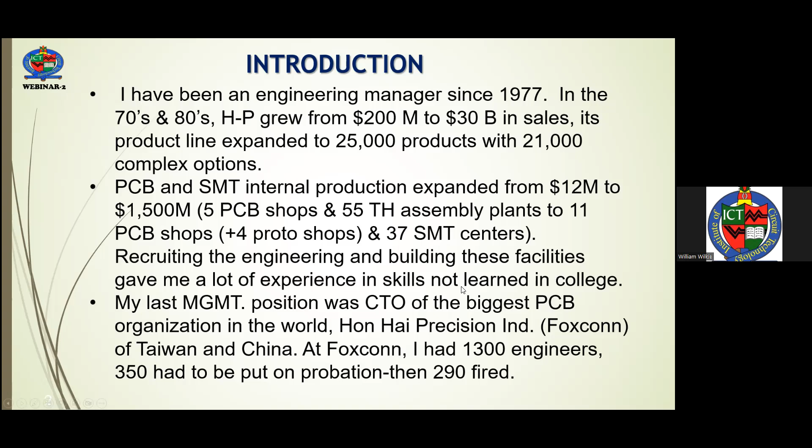But Foxconn being quite a bit different, Foxconn is a captive manufacturer. It's not really in the merchant market, and consequently always slid under the radar. And so, going from prototype and quick turn to extremely high volume was an interesting learning experience.

So we're going to talk about three of the most important parts of essential skills. These are all an important part of setting up the smart factory and also setting up the business objectives and goals for automation. You've had your homework reading assignments for the chapters of this that are in the book. If you haven't downloaded it, be sure to download it and read it, because I'm summarizing the chapters in 15 to 20 minutes. So there's much more illustrations and information in the particular chapters for you to go after.

And so my number one is total quality control, also called total quality management. This is one of the foundations of any kind of manufacturing, and one that I spent a lot of time in Hewlett-Packard learning. We were training everybody, design engineers, manufacturing engineers, production workers, in total quality management, which was started when Dr. Deming personally kicked off the program at Hewlett-Packard. He did that provided every executive and the president of the company sat in the front row of his course, because Deming very much believed that these programs are top-down driven.

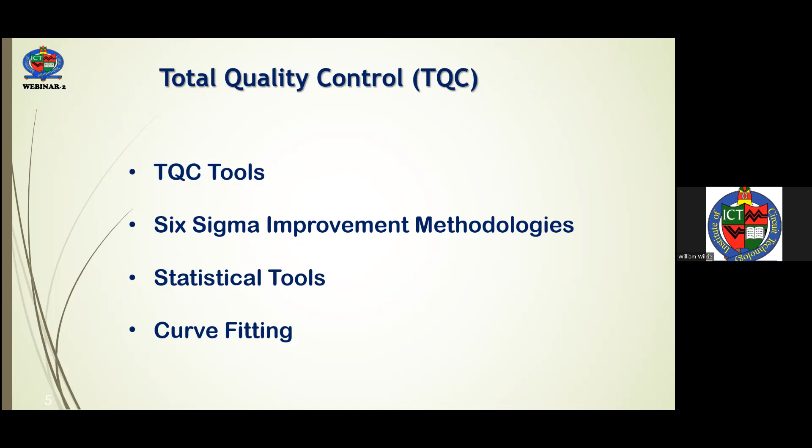And like I said, all of our executives were in the front row of the auditorium. As a junior engineer, I was kind of in the back, but nonetheless got a chance to listen to Dr. Deming personally. And so today, we'll talk about total quality control and another way of looking at that, Six Sigma methodologies, and then some of the statistical tools and curve fittings and design of experiments.

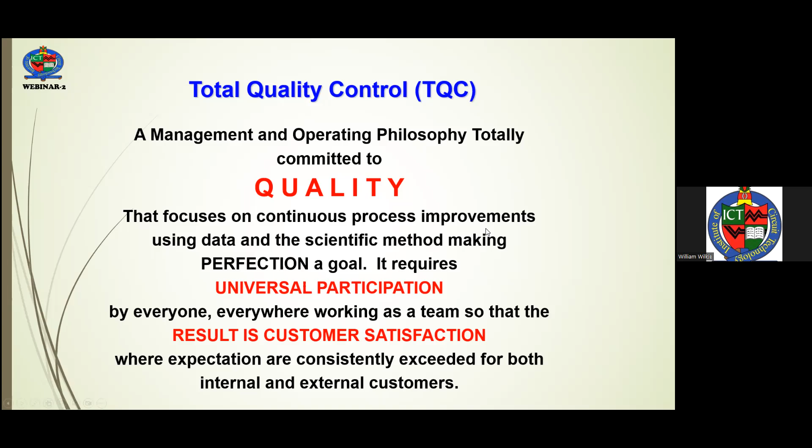So total quality control is a management operating philosophy committed to quality that focuses on continuous process improvement using data and the scientific method, making perfection a goal. It requires universal participation by everyone, everywhere, working as a team so that the result is customer satisfaction, where expectations are consistently exceeded for both internal and external customers. The simple little flow chart: focusing on customer satisfaction and quality leads to improved market share, decreasing prices and costs, improvement in profits and profitability. And I found this essentially to be true.

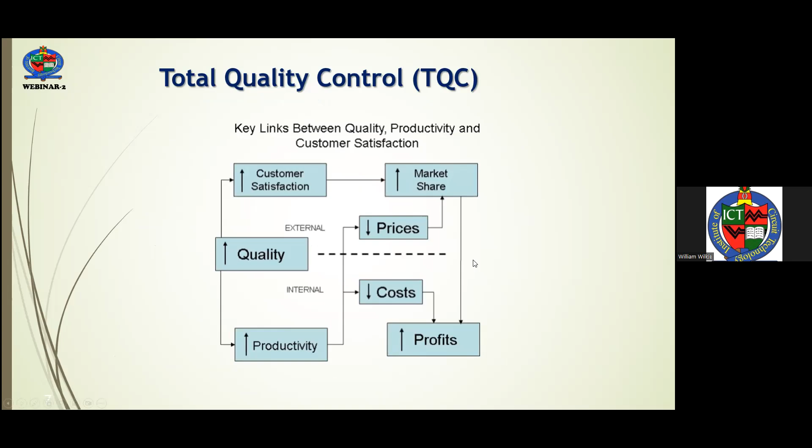So total quality control is not a new program. It's basically a management philosophy and an operating methodology requiring breakthrough thinking rather than doing things the same old way that we've always done them. It's a structured, disciplined approach to identifying and solving problems, developing new technology, and institutionalizing the improvements gained from those disciplines. It's not just firefighting, or hopefully will replace firefighting. It's conveyed by actions of management, not just by slogans and posters.

In other words, it's basically top driven. So it's a top down focus rather than bottoms up. It's a long-term focus rather than short-term. And it's supported by some of the QC tools that we'll talk about today. And this is one reason why TQC hasn't necessarily caught on, because it's not something where you send an engineer or supervisors to a course trying to get this thing from the bottom up. This really is a top down methodology. Like I said, Deming would not show up to start the program if the president of the company and all the vice presidents and executives were not in the front row through the entire program.

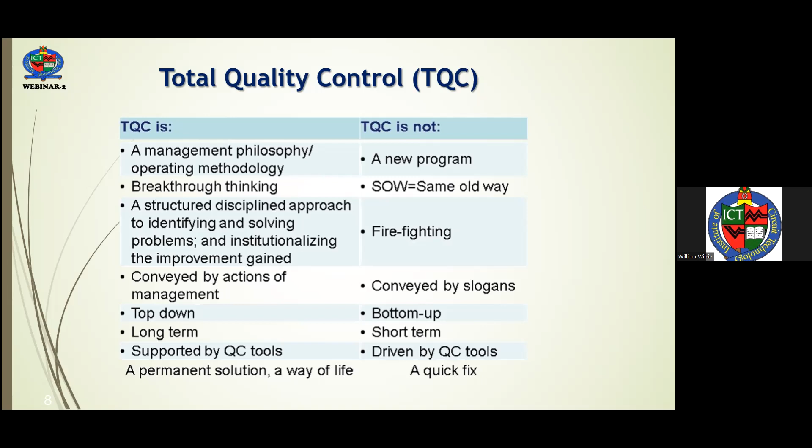And it essentially took hold because you realized that expectations were set by your boss. They weren't bottom-up, where you're trying to convince your boss how important this total quality control was. No, just the opposite. Your boss was teaching you how important it was. And so expectations totally got changed. And until you have that kind of management commitment and management philosophy, a lot of times these quality programs just won't stick and won't be effective.

So management commitment is really important here, as well as a customer focus on what you're doing, the continuous improvement, and employee empowerment, and everything being fact-based decision-making, focused on process improvement. So the tools for data analysis and display, I'll go over next, are cause and effect, histograms, Pareto, pie charts, scatter diagrams, spider diagrams, flow charting, cost benefit analysis.

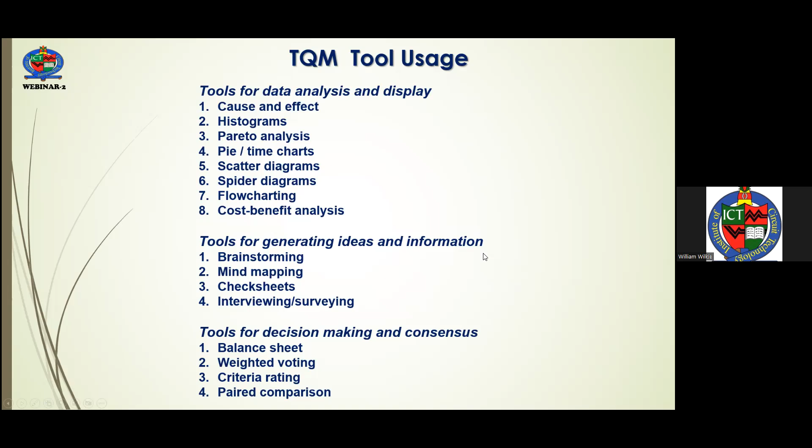But there are also tools for generating ideas and information: brainstorming, mind mapping, check sheets, interviews, and tools for decision-making: consensus gaining, weighted voting, criteria rating, paired comparison. So these are the fundamental TQC tools that you learn in total quality control in terms of process flow charting, fishbone diagrams, also called Ishikawa diagrams, histograms, Pareto charts, correlation, and control charts.

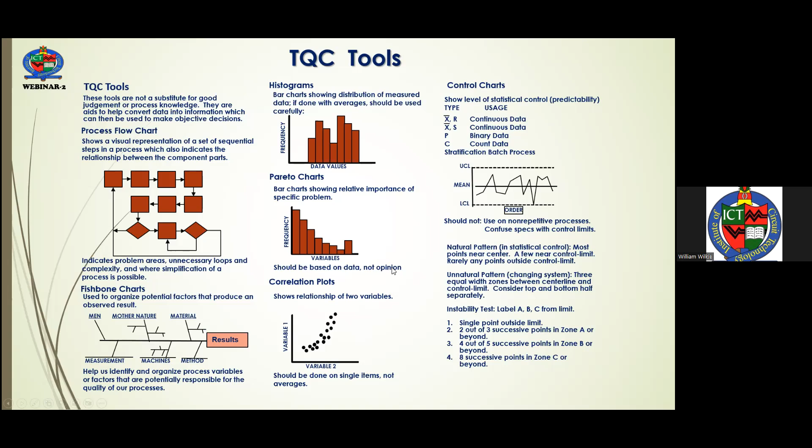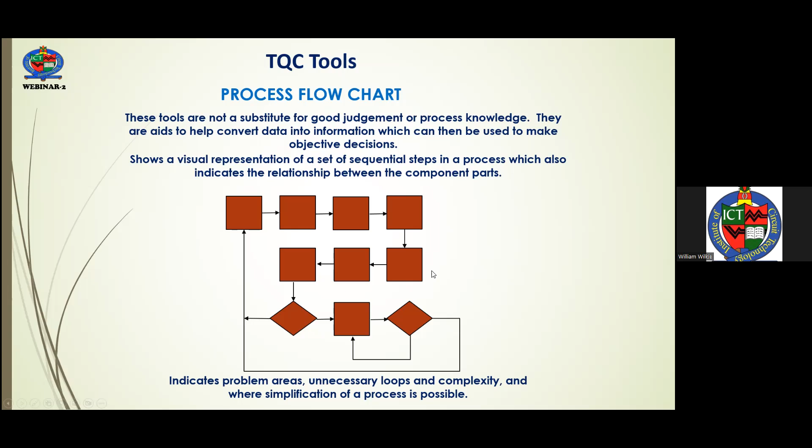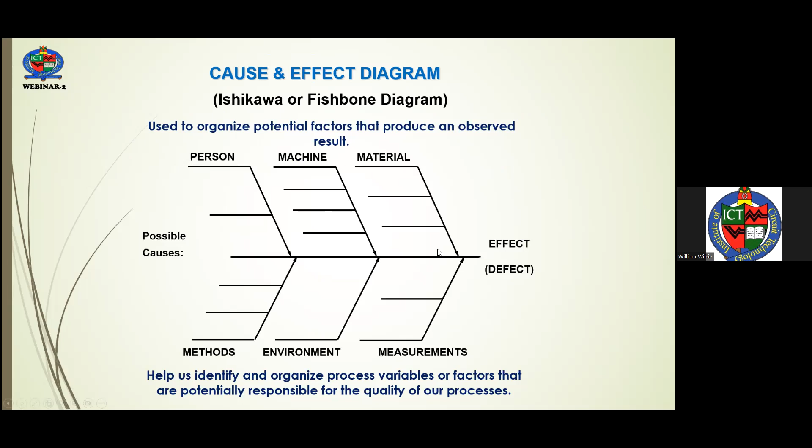So these tools are not a substitute for good judgment or process knowledge. They help convert data into information, which can then be used to make objective decisions, indicating problem areas or unnecessary loops or complexities, and where simplification of process is possible. Cause and effect, the Ishikawa or fishbone diagram, is useful to organize potential factors that produce an observation, be it customer satisfaction, yield improvement, defect elimination, or productivity.

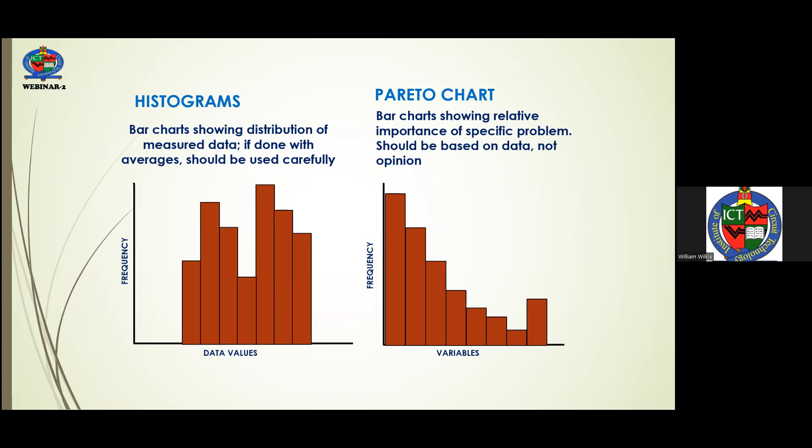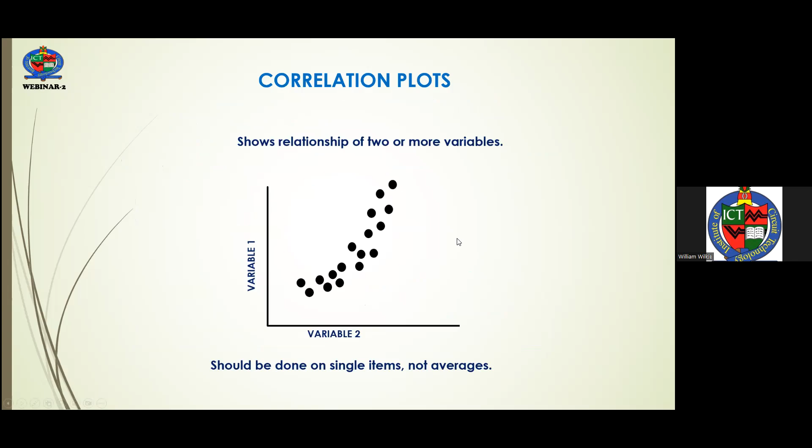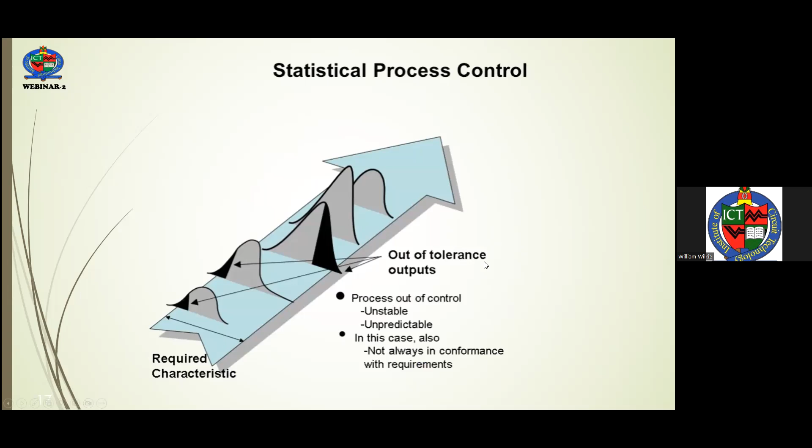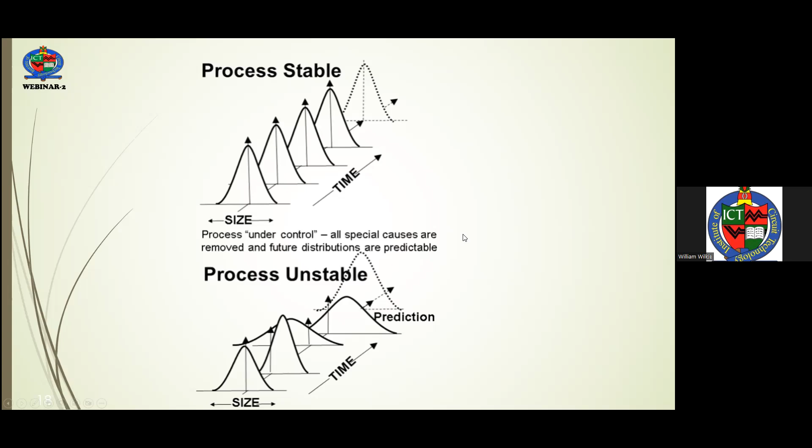Statistical process control, which this begins to focus on, helps show the out of tolerance situations, or the process being unpredictable or unstable, so that a stable process, over time, works within the predicted distribution. An unstable process may, over time, move in and out of what's defined as a stable process.

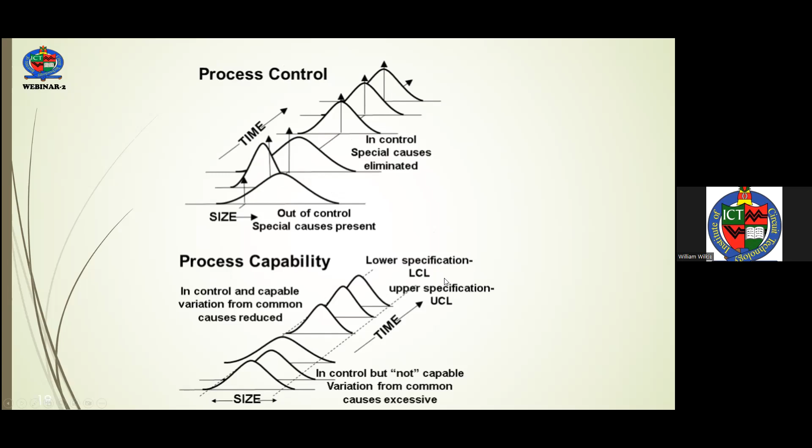And so, in control, special causes are eliminated from looking at an out of control process, or the process capability, in terms of upper or lower, so that a process may be in control, but it's not capable, because the variation from common causes is excessive.

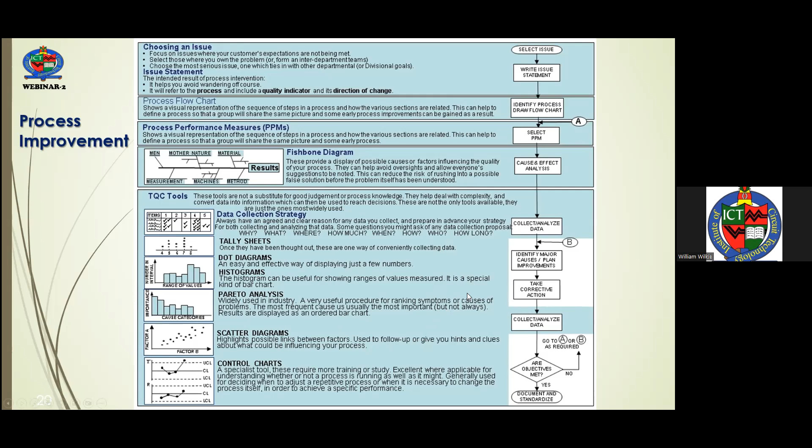If you look at using this for process improvement, then you go through a specific stepwise function of focusing and choosing, selecting the issue, creating an issue statement, producing a process flow chart, selecting process performance measures, using cause and effect analysis in a fishbone diagram based on that, and then using the different TQC tools to collect data for the strategy, analyze it, look for interactions, and put together the required action.

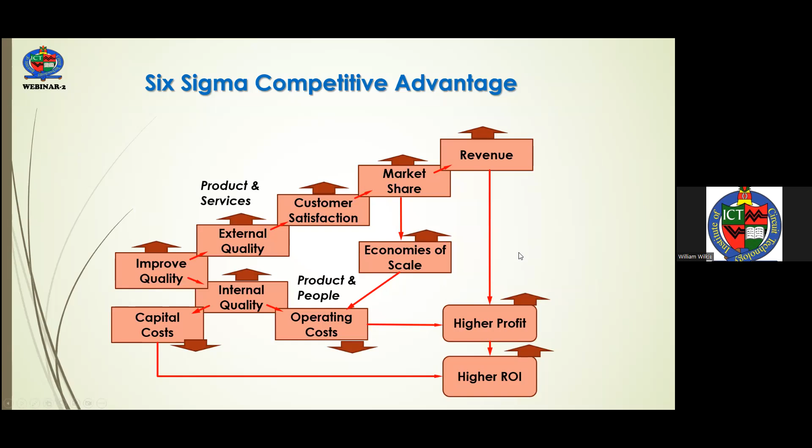This is similar to Six Sigma's competitive advantage, in which improving quality in producing products and services leads to higher profits, improved revenues and improved market share. A little bit different than TQC, but it's basically still the same focus.

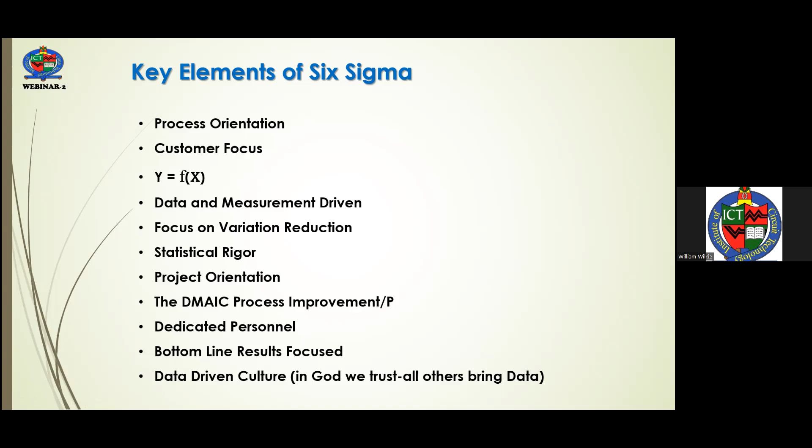The key elements of Six Sigma are a process orientation, but also a customer focus, and that data is collected and used to produce measurements and focus. And the focus is on variation reduction, or having a Six Sigma response, using statistical rigor and process improvement methodology with the bottom line.

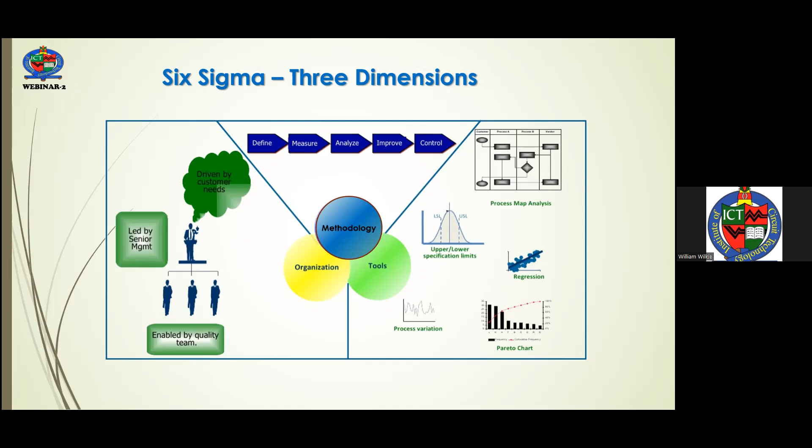So, Six Sigma has three dimensions: led by senior management, enabled by quality teams, and driven by customer needs, the methodologies, and then the tools in order to achieve business objectives set up by the organization. And total quality management and Six Sigma methodologies are numerous.

In the skills ebook, I've highlighted some of the chapters, but you can see that Six Sigma and TQM is much larger than just what I outlined in my essential skills. And that's one reason why it's useful to spend the appropriate time over the years, maybe each particular year, learning an additional skill within this methodology.

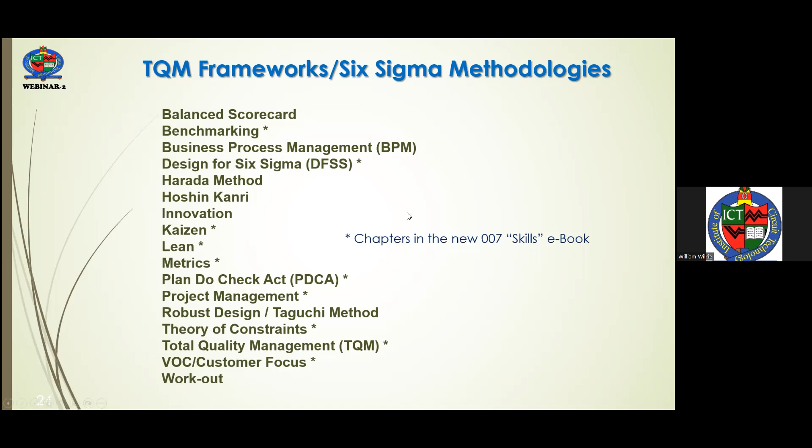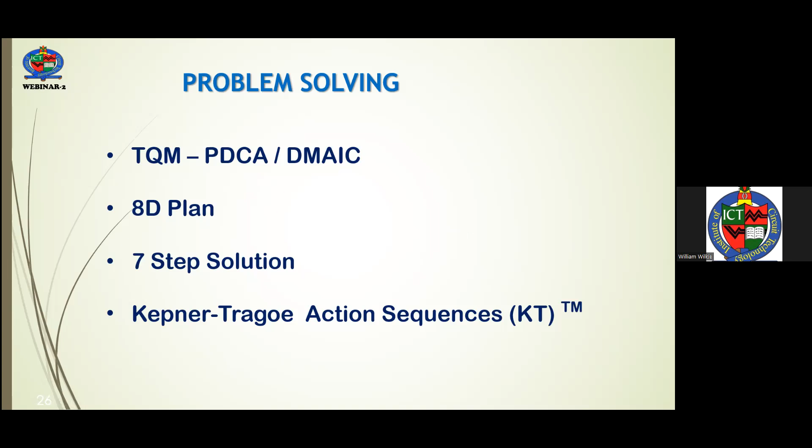One of the biggest methodologies and the most important is problem solving. And so both TQM and Six Sigma have the plan, do, check, action, and DMAIC methodology. There's also the 8D planning, the 7-step solution, and lastly, the Kepner-Tregoe action sequence, KT.

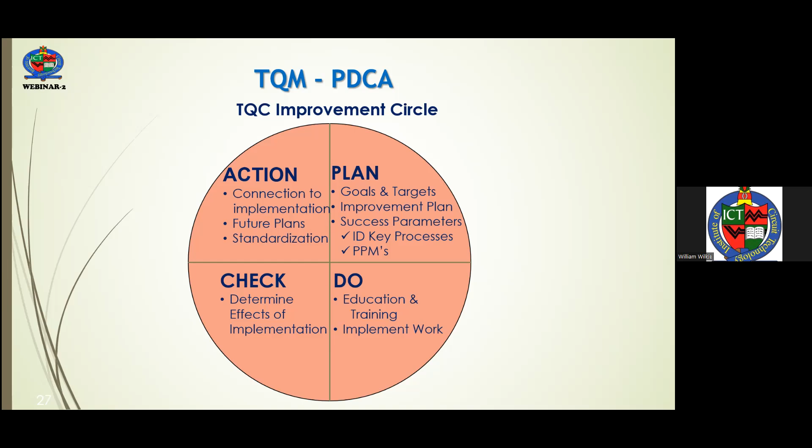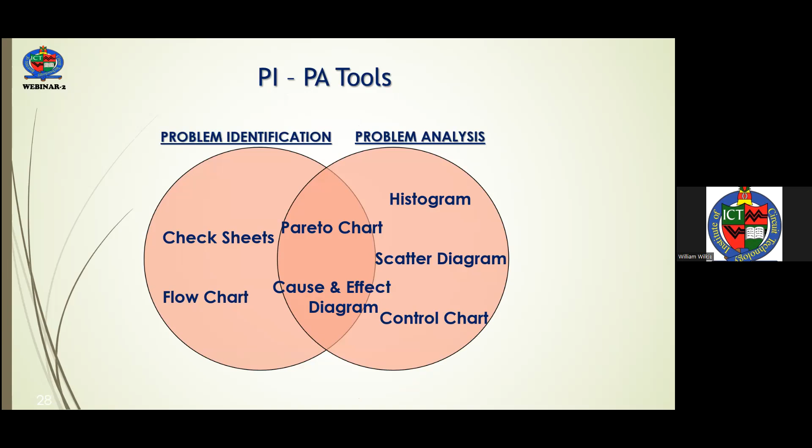This is one that TQM uses, that's basic, the plan, do, check, action circle, useful in terms of setting up goals and targets, setting up the improvement plans, the success parameters, education and training, checking for that, and then actions to standardize this. Within this, there are problem identification and problem analysis tools. And these are some of the ones we've talked about before in terms of flow charts, cause and effect diagrams, or scatter diagrams in terms of identifying a problem or analyzing a problem.

The DMAIC from Six Sigma talks about defining, identify and state the practical problem or objective, validating the practical problem by collecting data, measurement, analyzing the data, confirm and test a statistical solution, improvement, and convert the statistical solution to a practical solution, control. DMAIC.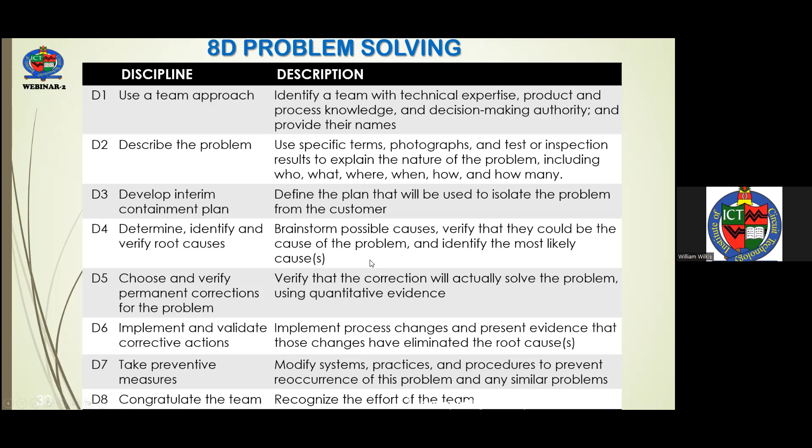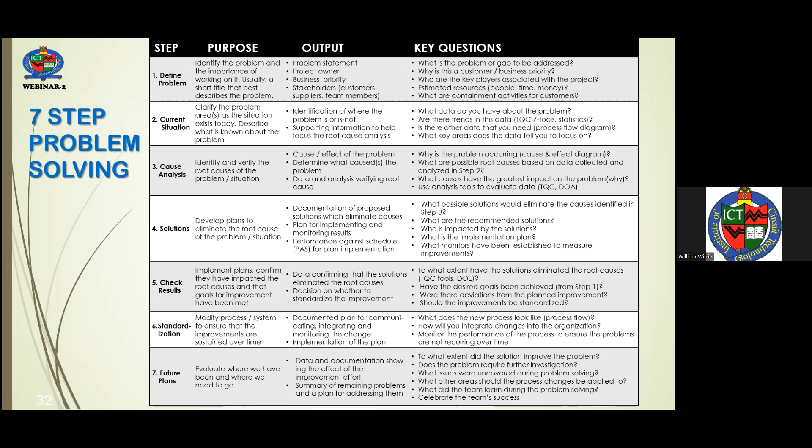This also matches the 7-step problem-solving methodology that sometimes they use in terms of: define the problem, clarify the problem with the current situation, identifying and verifying the root causes of the problem, cause analysis, developing a plan to eliminate the root cause of the problem, checking the results, modifying the process or systems to standardization, and then evaluating where we have been and where we want to go next.

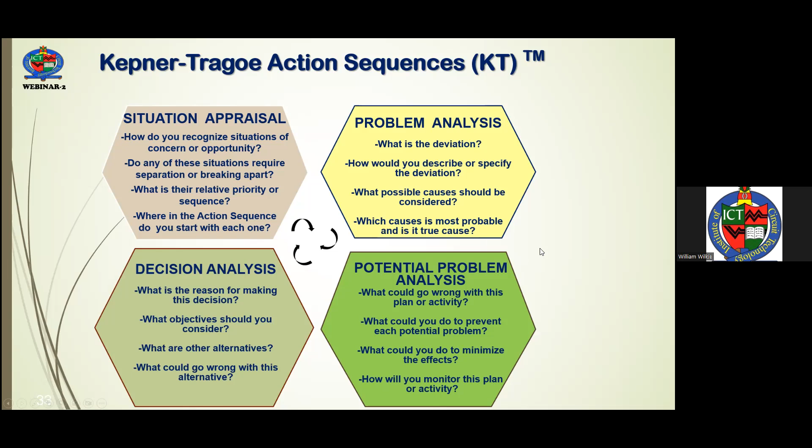My particular favorite is a result of a 3-day course I took from a company called Kepner-Tregoe, so it has a trademark, that focuses basically on situation appraisal, problem analysis, potential problem analysis, and decision analysis. The Kepner-Tregoe action sequence is very useful. This actually is a copy of a little plastic card that I have with me. I took this course in the mid-70s and still have that card and use it today

in terms of reminding of the steps in a problem analysis: the deviation statement, specifying what it is or is not, developing possible causes, testing of the probable causes, and explain it is or it is not, and verifying the data, and then moving on to decision analysis to choose a course of action, establishing the objectives, classifying the objectives in terms of wants and limits, generating alternatives, and comparing and choosing what fits and doesn't fit.

And then also at the same time, doing the potential problem analysis to assure success of the activity in terms of the action plan statement, anticipating problems, anticipating likely causes and their probability, selecting the action, and then providing information.

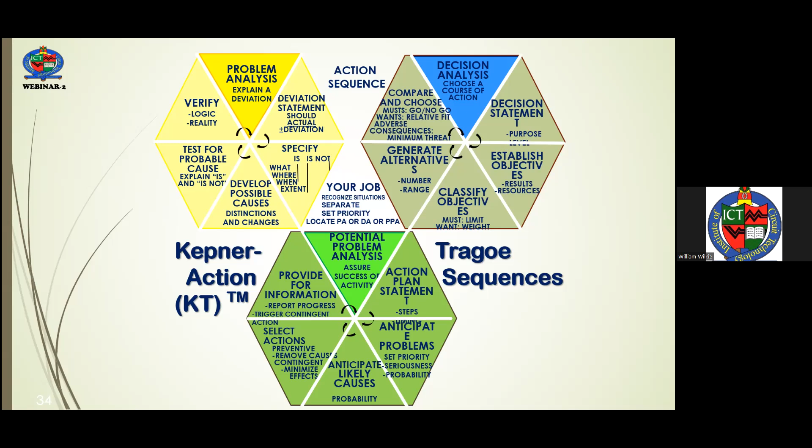And so one of the things, especially in printed circuit manufacturing and assembly, is this curve that I developed, in that this is a thermodynamically related process curve. In other words, the performance measure goes from 100% or perfect down to 0. And if the solid line there is our current process, if we can move from the solid line by a process improvement to the dashed blue line to the right, then whatever our problem is, or whatever the process is, we move from 2' to 2, but with the new process, we move up in performance to 3.

At the same time, if we can have feedback to printed circuit design in terms of best practices, how to improve the printed circuit board for manufacturability, or many times what we call design for manufacturing and assembly, then instead of 2 to 2', our product can be simplified. In other words, we move to the left, and so you would go from 2 down to the 2' by simplifying the product.

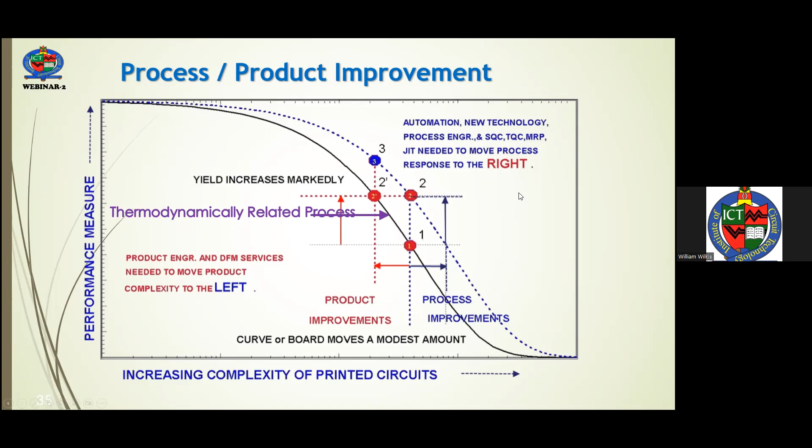So there are two elements: the product improvement and the process improvement. The process improvement is what manufacturing provides, but analyzing the cause of defects and yield loss and simplification can lead to product improvement. And that's a very useful tool as a feedback to improve not just your performance, but that of your customers and the like. So that depends on statistical tools.

And design of experiments is a very important methodology, and it's a series of well-established statistical approaches to addressing challenges over a wide range of disciplines. Design of experiments was basically created out of World War II and the use of agricultural statisticians working for the government. But design of experiments is a typical method that can be used not just to solve root cause identification of issues, but also for process optimization and assessment of inherent robustness of response, which in the new smart factory is now being called a digital twin.

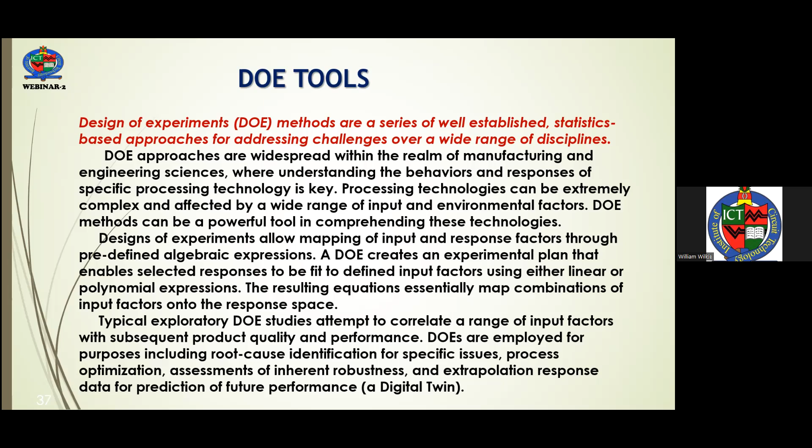So in the 1990s, the National Bureau of Standards, the US government, was distributing a popular statistical document called Handbook 91. That was replaced, and in response to Sematech, the semiconductor consortium, they created a new web-based statistical handbook, including statistical software, called the E-Handbook of Statistical Methods. We call it the Engineering Statistics Handbook. This is one of the best handbooks and software designed for process engineers such as those of us in printed circuit fabrication or electronic assembly.

And this is not like a university text where they focus on the mathematics of statistics. This is one of the best books written for a working process engineer. And so you'll see that, look at some of the chapters, but also to make this usable for everybody, it's available in 7 different operating systems, as shown there in the bottom.

Because I don't know how long this is going to be available on the internet for free, I encourage everybody to download the Engineering Statistics Handbook and the software. And I caution you about printing it out. The Engineering Statistics Handbook is 2,800 pages. It's designed to be a hypertext reference document. It's not really a printed book, unless you're used to carrying around 2,800 pages. It's much more useful because of its hypertext ability on a tablet or a simple slate PC for review.

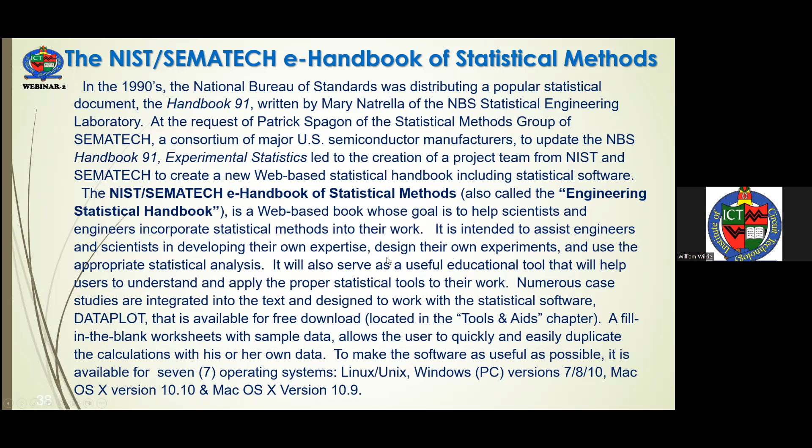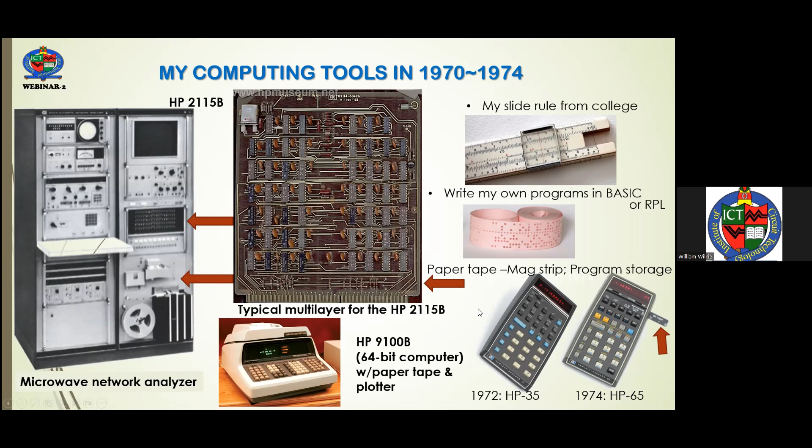But I also had sometimes the 64-bit computer with paper tape reader, the HP 9100B down there, which, interestingly enough, is the world's first portable computer. Even though it's a 64-bit computer, we had to call it an instrument controller because in 1968, when this device first came out, 64-bit computers required an air conditioning plant and were the size of a small house. And no one would believe that you could make a 64-bit computer the size of a typewriter, as it's seen in the middle. So we called it an instrument controller, but it's a full 64-bit computer that I used.

Typical of design of experiments was this program I wrote in 1970 in BASIC using the Plackett-Burman design for experiments. This particular one was focused on electroless copper voids. And this shows a little bit of the 96-line BASIC program and the program output from having to write the software. Today, you have the ability of the Sematech handbook and all of this software being available for you free of charge to download. But when I started, that wasn't the state. And we had to do this on our own if we wanted some of the work.

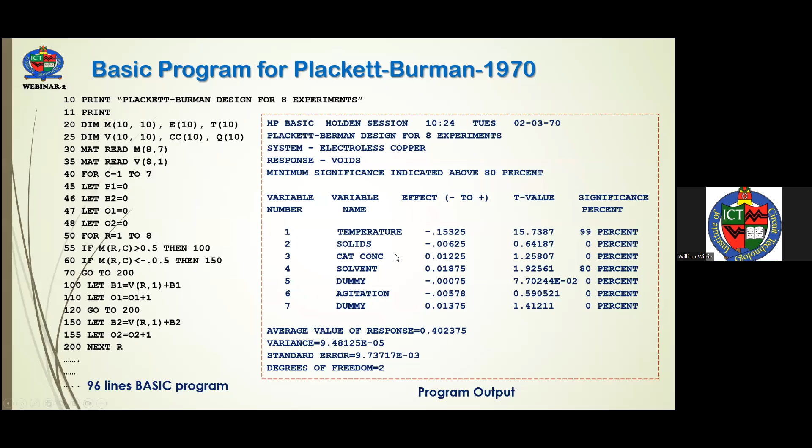So the NIST Sematech e-Handbook of Statistical Methods is an excellent, not just handbook, but it provides examples and tutorials so that if you're not familiar with any of the statistical techniques, that's okay, because they start out with the very basic assumptions and provide areas like selecting the right statistical tool, in terms of measurement system analysis, or you want statistical process control, or method comparisons, or design of experiments, which I'm talking about. And are the factors in the design of experiments quantitative only, or not all of them quantitative?

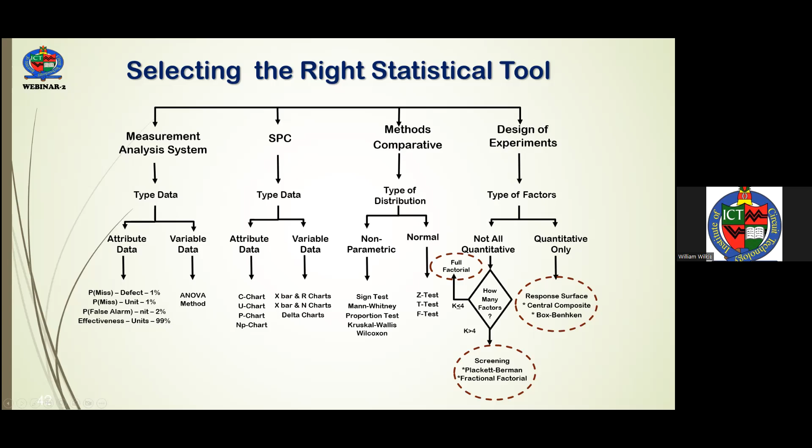Here's what you'll see if you go to this particular URL I provided there. Unfortunately, you cannot go to nist.gov and find this any longer. About 10 years ago, other topics took over the website in terms of the main menu, but it's still within the website. Again, I emphasize, please download it and download the software as soon as possible, because there's no guarantee how long that'll continue to be available for free.

But one thing you can see there in the handbook chapters is, the first chapter is not about mathematics. It's about, do you have a problem? Exploratory data analysis. And the 8 chapters move you through how you would solve the problem in terms of measurement of process characteristics, measurement of production process characteristics, process modeling, process improvements, and then process monitoring or control, and product and process comparisons, and finally, assessing product reliability. In other words, if you think you've solved the problem, great, but have you, in creating this solution, created a reliability issue? So this is quite a bit different than a university course, in terms of how it focuses on the working engineers such as we have.

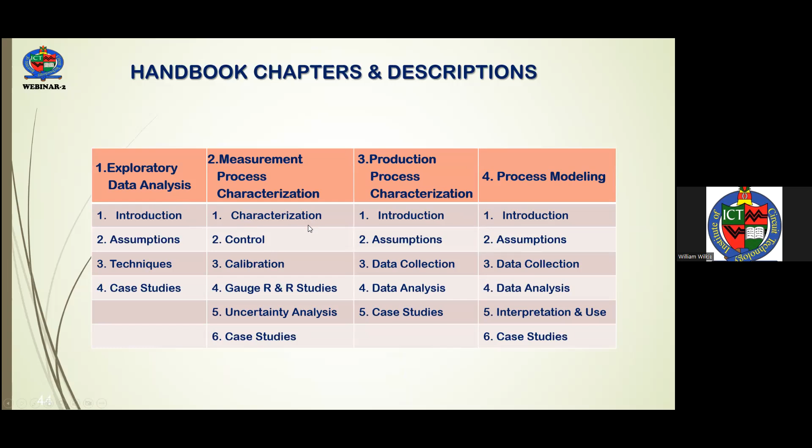Like I said, each of these chapters provides a case study, an example, a set of data, so that it takes you through using the software that you can download on your computer, and then gives you the feedback, and then encourages you to add your own data and your own variables into that, and then discusses the results. So this is very much an interactive and self-paced method of learning statistical tools in an excellent fashion.

And I first came across this about 25 years ago, looking for a way to assess Weibull reliability data. One of the things is because I didn't have a way to plot the unusual looking Weibull reliability data, and went looking for it and came upon this chapter 8, trying to figure out what have I found myself here, and eventually backed out to find an entire set of software and a book and a handbook available to provide a lot of insight that I hadn't had at university training.

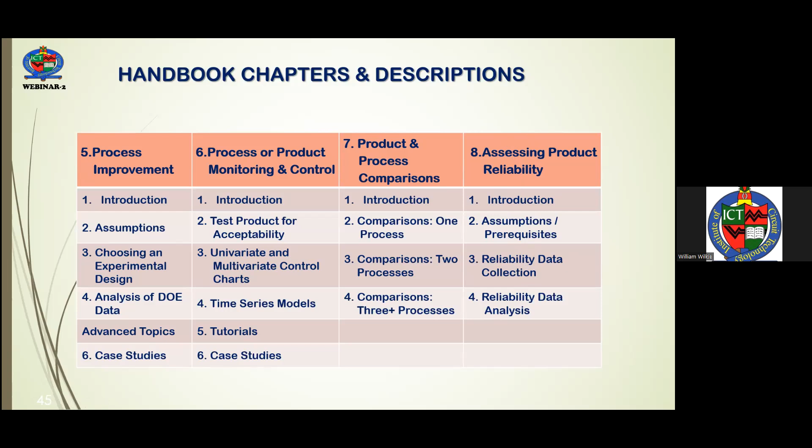Now, an important part of that, I also found in doing this, is curve fitting and correlation, which again is an important tool to help you establish the model. And this set of shareware software that's right here called Curve Expert is interesting because it provides 30 different regression models there in the upper right-hand corner already set up. So once you put in the data and save it, it'll show you the interactions and the regression analysis of different models. The model that I'm showing right here is one of my favorite.

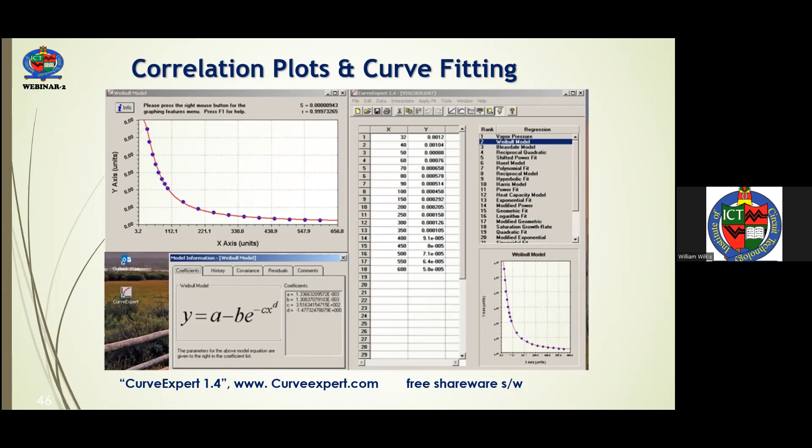This is the defect density model in semiconductor. The interesting thing about the defect density is it's the same model that governs printed circuit defects. So it's very, very useful in correlating independent and dependent variables of a particular printed circuit, and that's the Weibull model. But you can also enter your own models into this. Extremely useful, and because it's pre-set up, many times I go to this before I go to the data plot one that's provided.

So design of experiments is, fortunately or unfortunately, one of the ones that you might get at the university, but in my particular university, I was able to have a chemical engineering course on this, but the next year they dropped it because of the need to add other courses for the engineering. And so this is what I consider one of the most expensive, important of all tools.

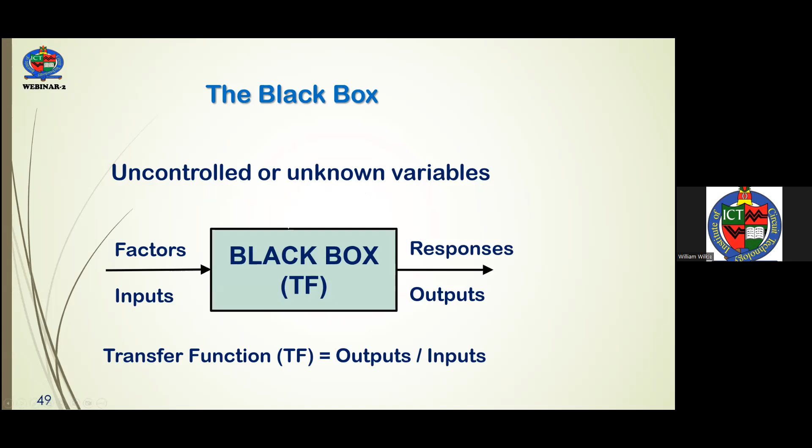And the reason is that many times what we're doing in printed circuit or assembly really involves a black box. In other words, we're providing the inputs and we're looking at the outputs, but the transfer function and what happens inside that black box is not necessarily something that we understand. And there are controlled and uncontrolled variables involved.

Now, the interesting thing about engineering is, when faced with a problem, I found that engineers many times have the wrong first action. The common sense approach is always recommended as let's hold everything constant and change one thing at a time. Well, this technique is fast and cheap when it works, as it often does for confirming single or independent factors whose presence can be logically suspected.

The biggest problem that I found in electronics manufacturing is that the independent factors we're looking at are the quantitative factors, grams per liter, temperature in Celsius, et cetera. Those variables that we've been told are important and that we should control. And so we have a tendency to jump on them first.

What's more likely to happen in the real world is that the qualitative variables are involved in this. And the qualitative variables may be winter versus summer. It may be first shift versus the second shift. It may be machine 1 versus machine 3, or tank 1 versus tank 3, or who did the maintenance or failed to do the maintenance. It's not a quantitative number like degrees Celsius or RPM.

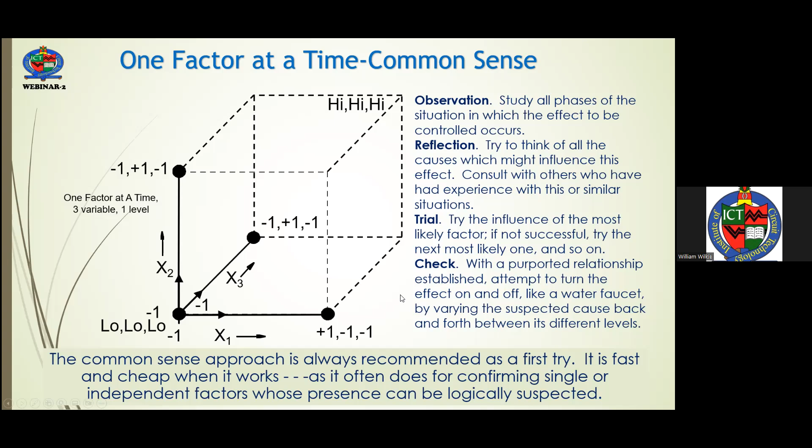It's qualitative. And because there can be many, many qualitative variables involved there, holding everything constant and changing only one factor at a time will not find the solution because you're not looking at the entire problem. And that's where you get into factorial design of experiments. The number of factors: if there's one factor, it can be solved by common sense and things like that. But what if there's 2 to 4 or 5 or more factors involved, both quantitative and qualitative?

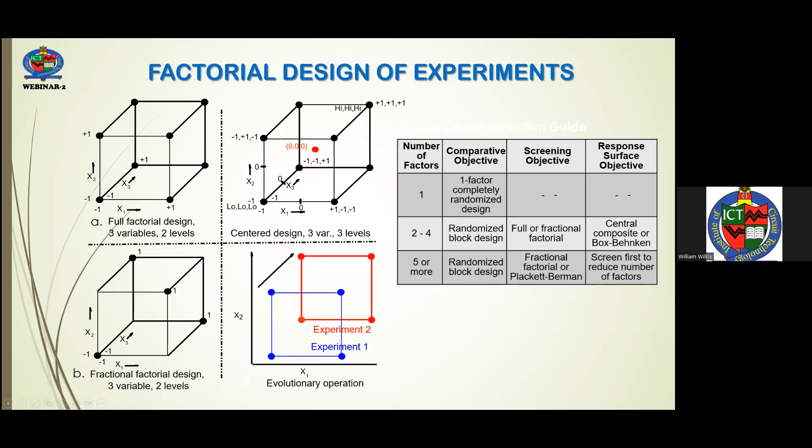And you get into what we call full factorial designs, or centered designs, or fractional factorial designs, and even evolutionary operations. That's one reason why in some of the problems that I was initially faced with, I had 5 or more variables. And so I needed a Plackett-Burman methodology. And to get that, I had to actually write the program in BASIC so I could run it on the HP computer, because I didn't have anything else available, and I wasn't at the university anymore.

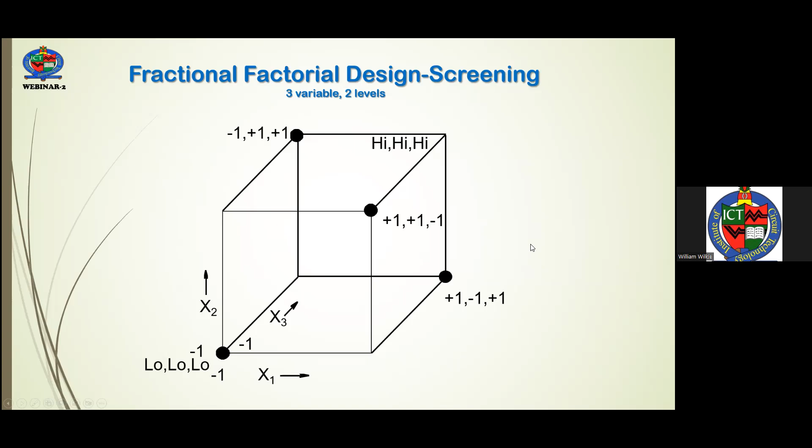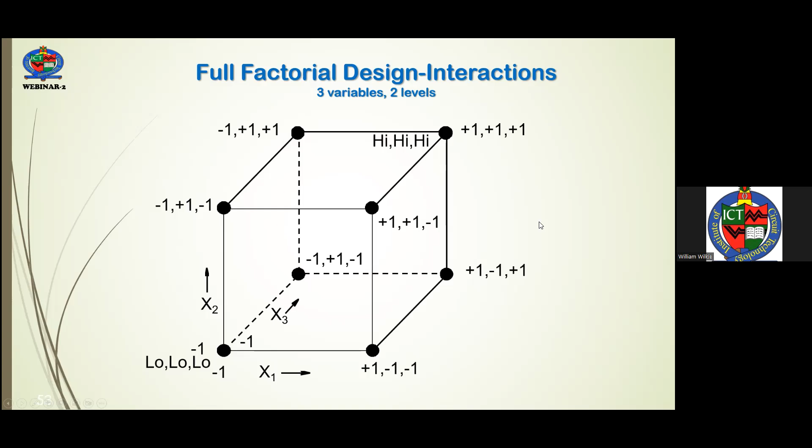After we've whittled this down to 3 or fewer variables, we may go to a full factorial design with interactions, because now we can check for interactions and detailed analysis, or even one with a centered design to have 3 levels, so we can check for linearity and nonlinearity as well as the interactions.

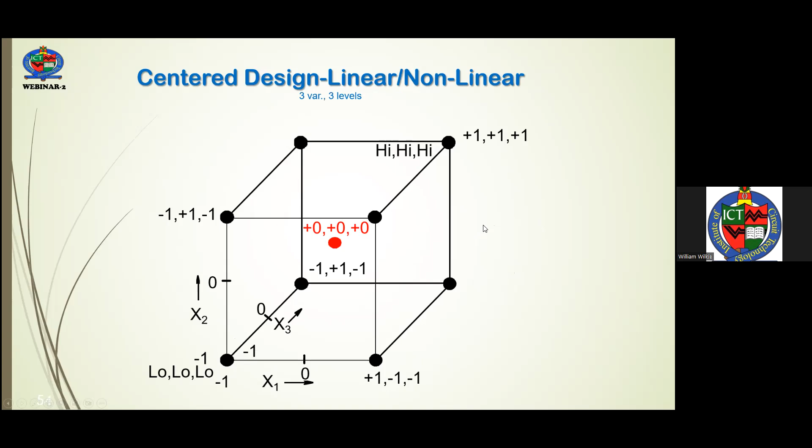And as the pulse went down the chain, depending on the opposite side of the prepreg, there is either copper or no copper at all, and you get a 1 and 0 with an op amp at the end of it. So when you turn this machine on, in 3 minutes this thing entirely loaded the 64-bit operating system and everything else. And then the variables, once it was run, were core memory based, but the read-only memory was this.

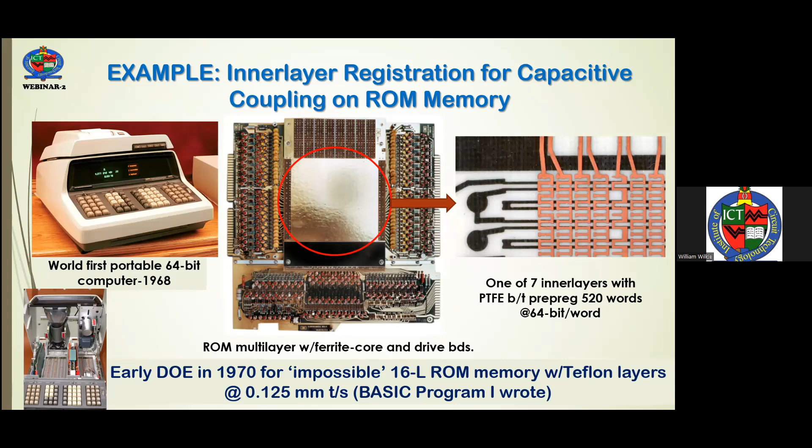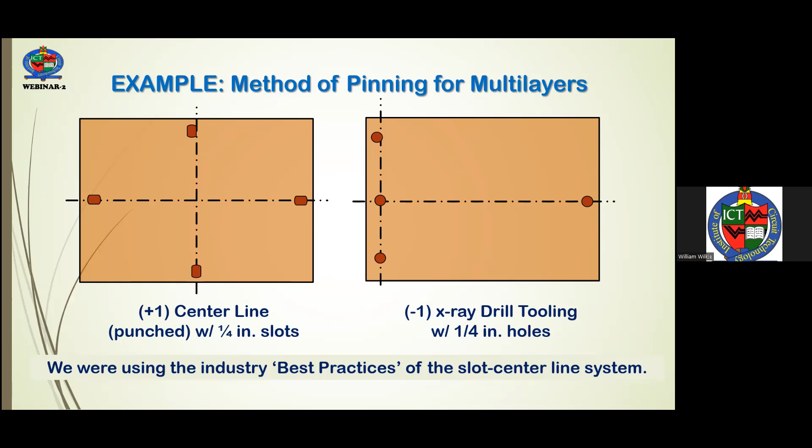Another example early on was looking at the difference between the industry best practice of a slot centerline system versus drilled X-ray tooling hole methodologies. And so another variable on this, not just the methodology, but the method of venting, either no venting or copper venting. And so this is kind of a full factorial design of 3 variables at 2 levels, whereas the response is the image shift in microns of the particular targets, whether or not we had venting, the tooling holes, and then the actual pressure.

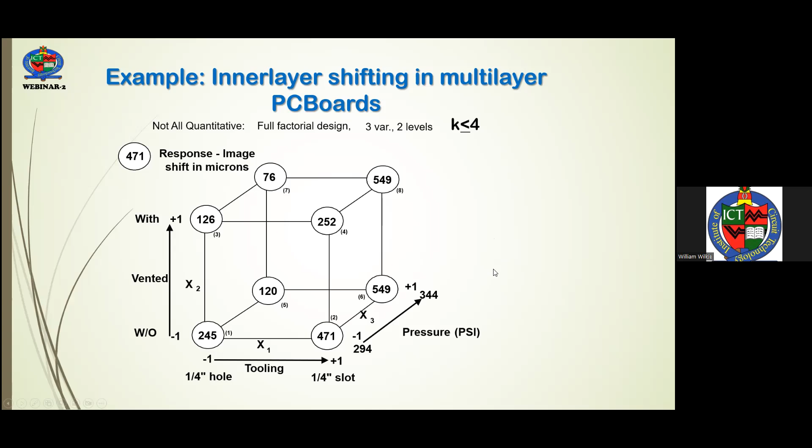So you can see that, yes, there's a quantitative variable in terms of pressure, but you've got 2 qualitative variables in terms of method of tooling and venting. And this is the reality of today's modern manufacturing. It could be man, it could be measurement, it could be the machine, it could be the environmental factor, it could be who you bought the chemicals from, it could be storage life, it could be maintenance. All of these potentially are interacting in your manufacturing process. So having the tools to categorize and work with them.

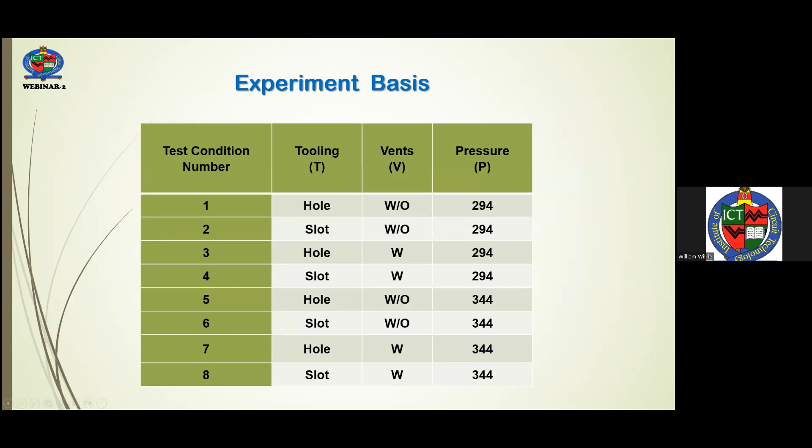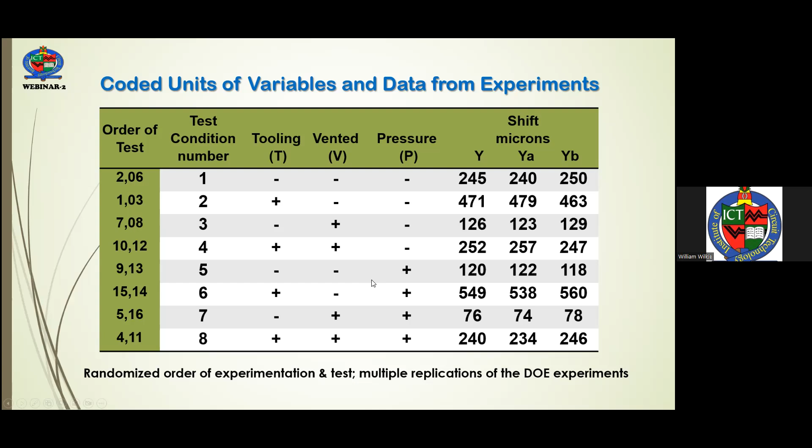And so for the 8 experiments, these are the tooling, vent, and pressure, T, V, and P. And these are the particular order of tests and results in terms of shift in microns of the experiment we're doing, and the response of the innerlayer shifting in a multilayer PC board. This is circa 1972, 1973. So it's pretty old, but yet it shows significantly how we were able to improve productivity and improve quality even back in the early 70s by the use of these tools that had been developed during World War II.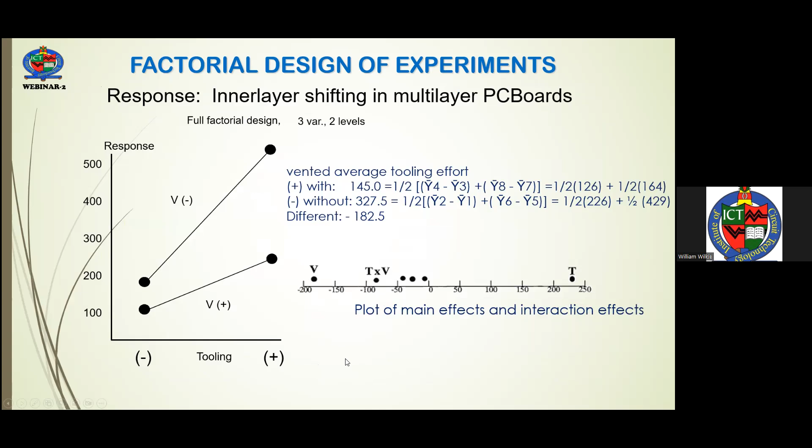And the statistical handbook will help you go into the interpretation of the interactions in terms of main effects, 2-factor interactions, and 3-factor interactions. Now the advantage of this is that this will allow you also to produce an equation that models this performance and results. The beautiful thing about that is that these equations also can be turned into digital twins. And so for the smart factory of the future, you can use these design of experiment methodologies to help you create the models that allow you to predict what's going to happen outside the parameters. And we'll talk about that a little later in the lectures, when we're talking about the automation methodologies.

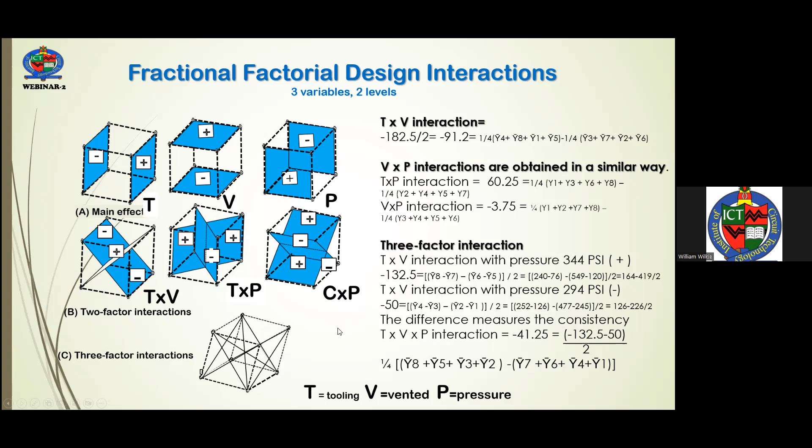It's a lot. That's why I encourage everyone to read through the chapters in the 24 skills, but also to download the NIST Engineering Statistics Handbook and read the first chapter on why the NIST/SEMATECH Handbook was put together, and how this will help you in your pursuit of process improvements, problem solving, and improvement in the printed circuit and assembly world.